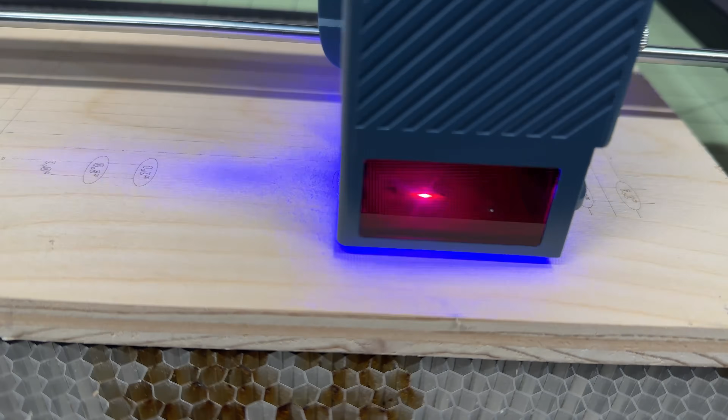If you're an artist or maker thinking about your first laser, this is usually the real question: will it actually fit in my small studio and a real workflow?

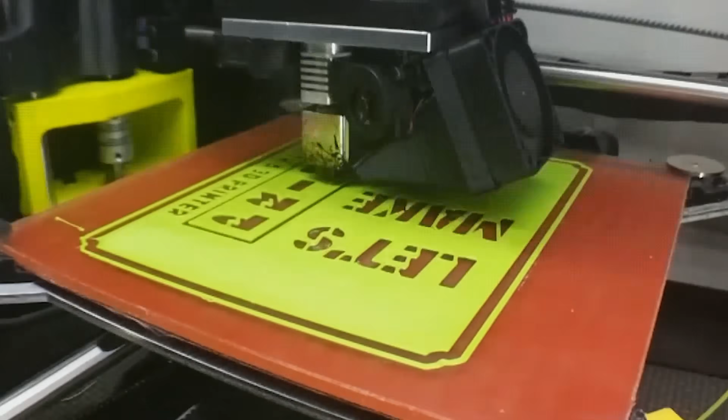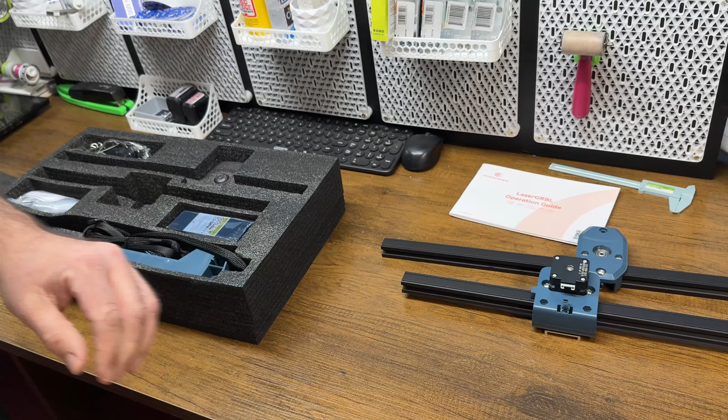This is the WizMaker WAND 12-watt laser. It's aimed at beginners and small studios, not production shops, not industrial users. I want to show you what it's good at, where it hits its limits, and whether it makes sense if you're just getting started or adding a laser to your existing setup.

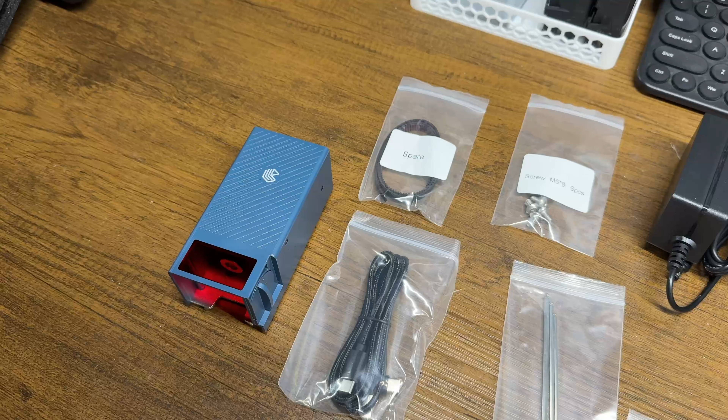I'm just going to skim through the unboxing and assembly of the machine. It came well packed and mostly assembled. It took a few screws and the provided tools, and I went from opening the box to setting up my first cuts in less than 10 minutes.

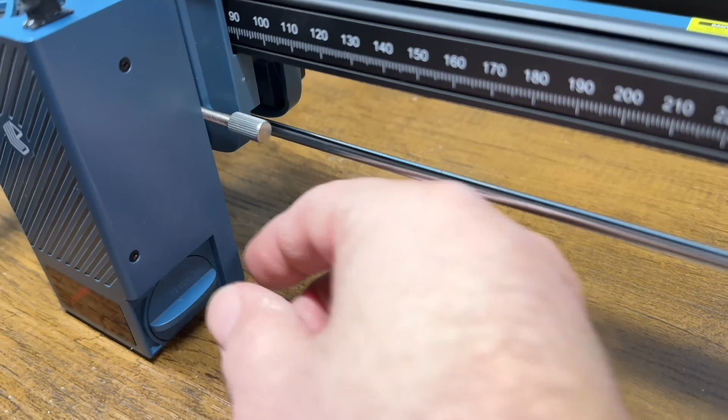Before we jump to cutting, a quick note on safety. The laser beams from this type of machine can cause immediate and permanent eye damage if not used safely. This machine has a shield around the laser, but glasses are still 100% required, like all open body lasers. It came with its own glasses, but they're not marked with the details of what protection they offer, and I always recommend buying a pair made specifically for the type of laser you're using from a reputable seller.

I'll link a great video on the subject down in the description, but we're not talking a lot of money here. This laser comes with its own free software, but Lightburn's a great program and easy to learn. If you're already using Lightburn, then this machine will work great with it.

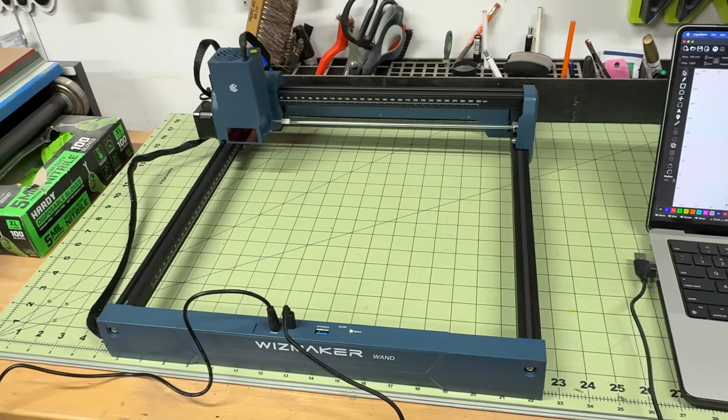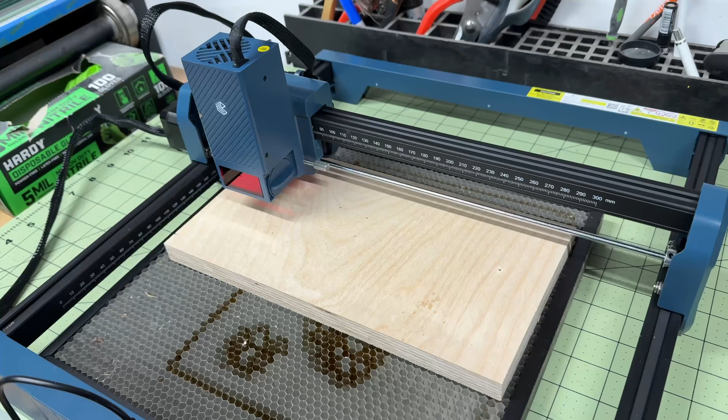Since this machine is open, I wanted to put down something to protect my work surface. I have a plate and a honeycomb from a different laser, but there are lots of options out there for this. The cut area is 300 millimeters by 300 millimeters, about 12 by 12, so really a lot of work area.

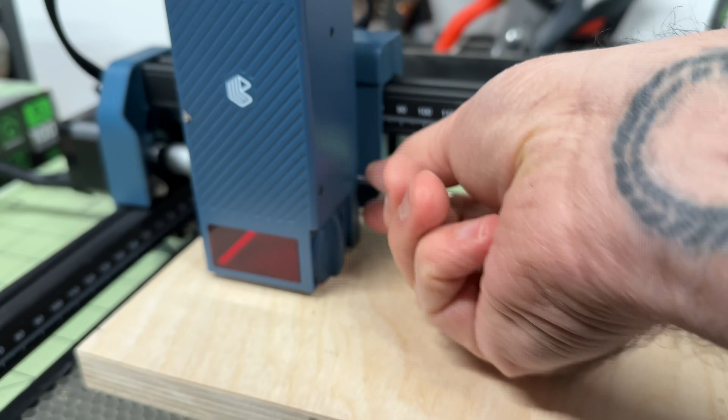I really enjoyed the focusing process on this machine. You simply rotate this small knob, loosen the thumb screw until the laser head touches the surface, then tighten the screw and rotate the knob to its storage position. Now you're perfectly focused.

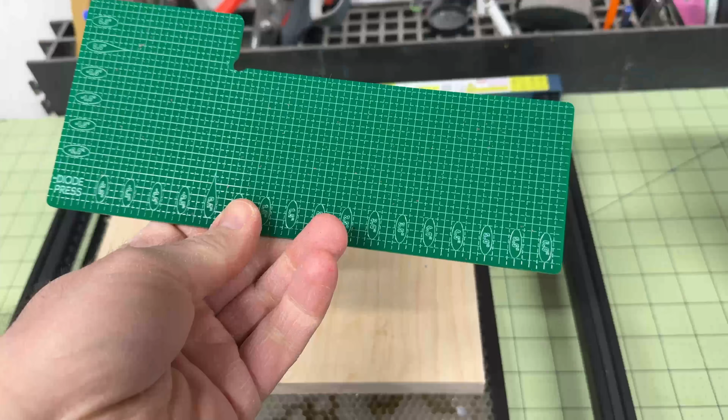For my first test, without really reading much about settings, I engraved on a piece of plywood. This is eventually going to engrave the back of a printmaking registration jig that I sell, but that'll be a future video. WizMaker provides a full list of cut and engrave settings for most materials, so I pulled that up next.

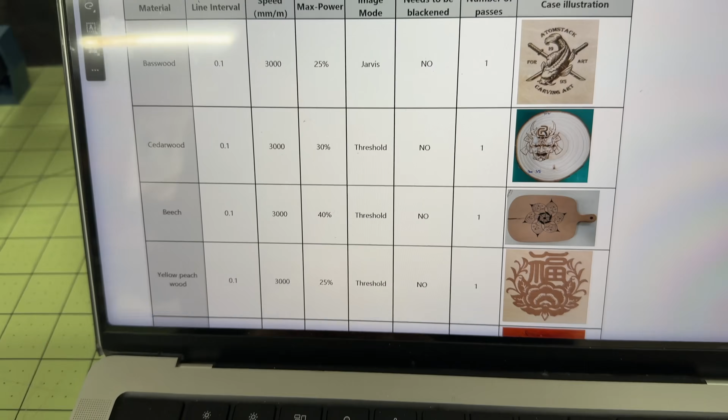I wanted to test the speed and accuracy and also the smoothness of curves. So I loaded up my registration jig file, and I plan on using this machine to engrave these jigs in acrylic in the future. After framing my piece on the wood panel, I put on my glasses and hit start.

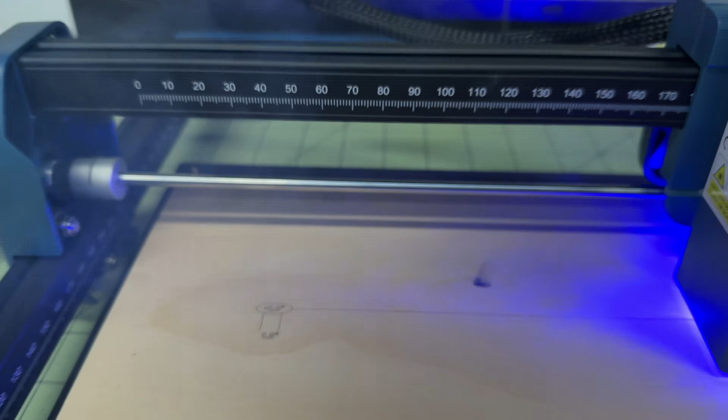This is an open machine and doesn't have an exhaust system built in, so you'll smell the smoke of whatever you're cutting or engraving. So good ventilation or a dedicated extraction fan is important. In this case, it just smells like burning wood, and I'm in the garage with the door open.

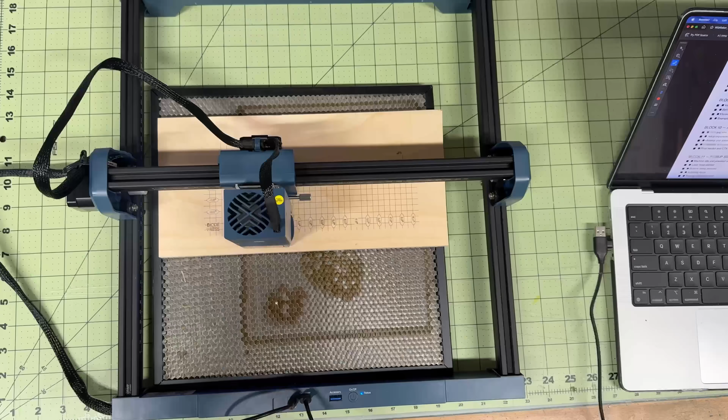Check out their website for the list of materials you can cut, and keep in mind it's a diode laser, and it can't cut clear materials. These aren't deal breakers, they're just trade-offs, and at this size and price, I think it's worth it.

Let's grab the calipers and have a look at the measurements. And no surprise, they're right on. The line width is very fine, and the quality of the cut and curves look great.

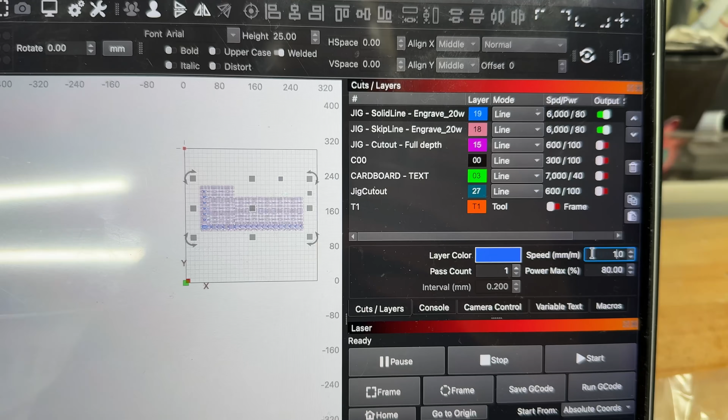Now they list the top speed as 10,000 millimeters a minute. It's very fast, so let's crank it up and give it a try. It's not going to achieve that speed on short lines and curves. It needs time to speed up and slow down, but it's still very fast and accurate at that speed.

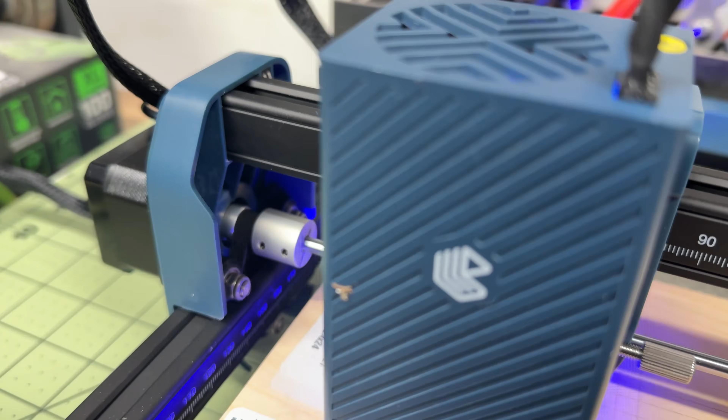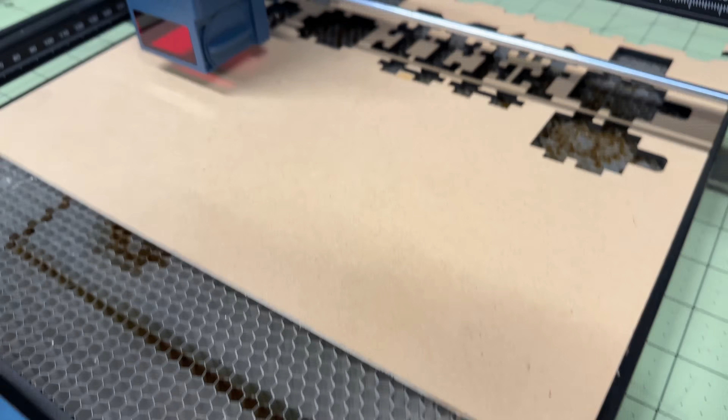Last up is a test cut. This machine's going to do great on thin wood, paper, leather, and anything else that's relatively thin. This is 1/8 inch MDF, and they listed at 170 millimeters a minute at 80% power. So I quickly drew up a box and tried it with those settings.

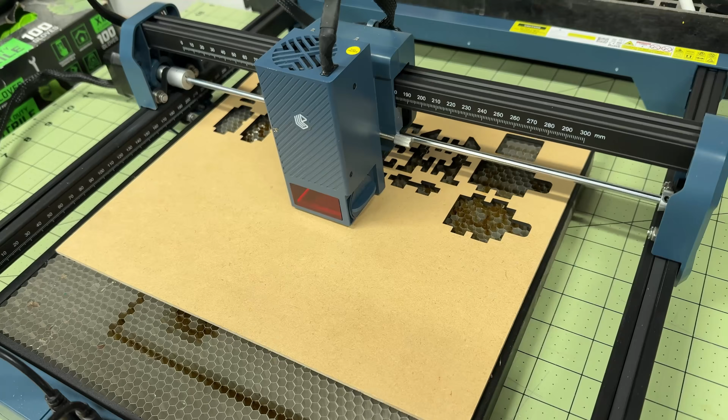And it had no trouble at all.

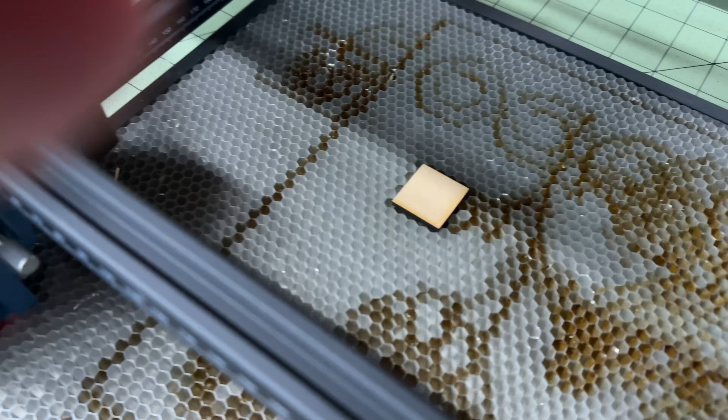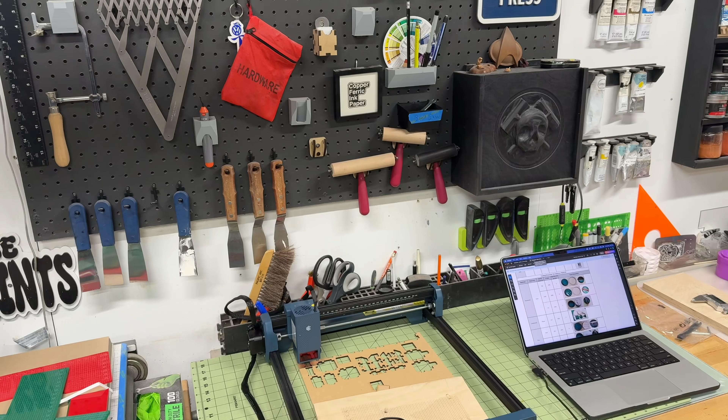So after spending some real time with this laser, what stands out to me is how approachable it feels without being limited right away. It's not a production machine, and it's not trying to be, but for artists and small studios and makers who just want a laser that fits into an existing workflow, I think it makes a lot of sense. If you're curious about adding a laser without committing to a big footprint, big cost, or a learning curve, then this could be a solid place to start.